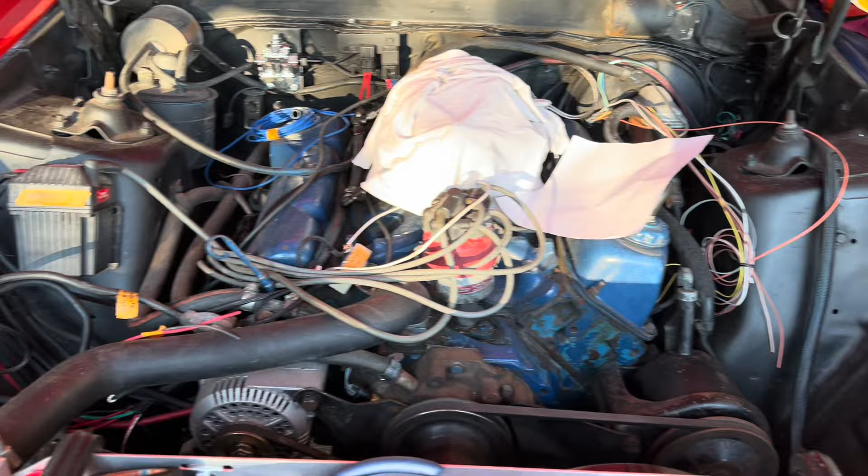It's been a while since I've worked on it, probably a couple months, maybe a little less or more. The issue I was having was this part that finally came in, took that long. It's from Tanks, the kit for the fuel pump to go inside my tank.

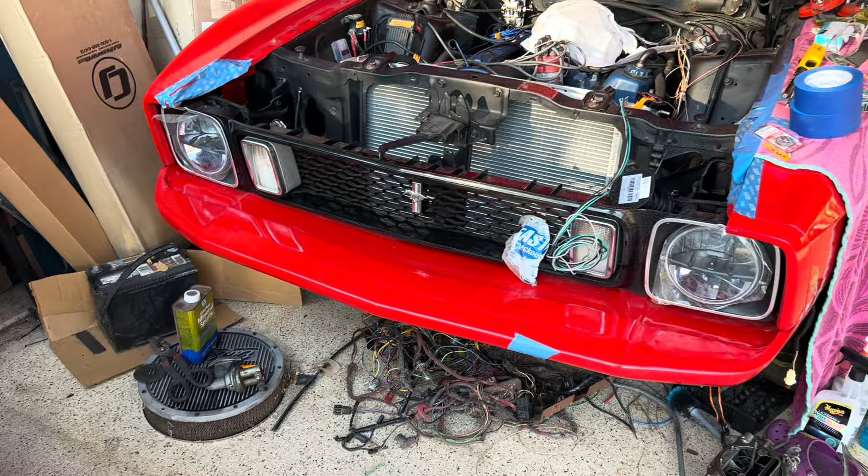That way I don't have any issues with it down the line. Looks like it's opened already, I did not do that. Hopefully I have everything I need. I'm gonna go ahead and take the tank out, see how everything fits before I actually start cutting into the tank and mounting it.

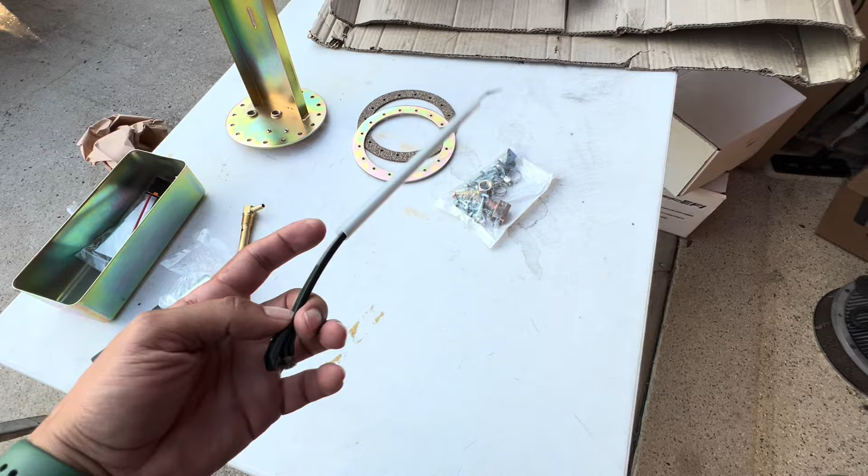Okay, here's what the kit comes with. I got the little tray, I believe this mounts to that somehow. Got a gasket, and I think this goes in the top of the tank. The hardware, that's trash. A few zip ties and a straw in case I need a drink... actually I think that ties into this somehow. And this is something for safety, I think it's like a rollover type gas shut off or something like that. I don't remember the exact name for it.

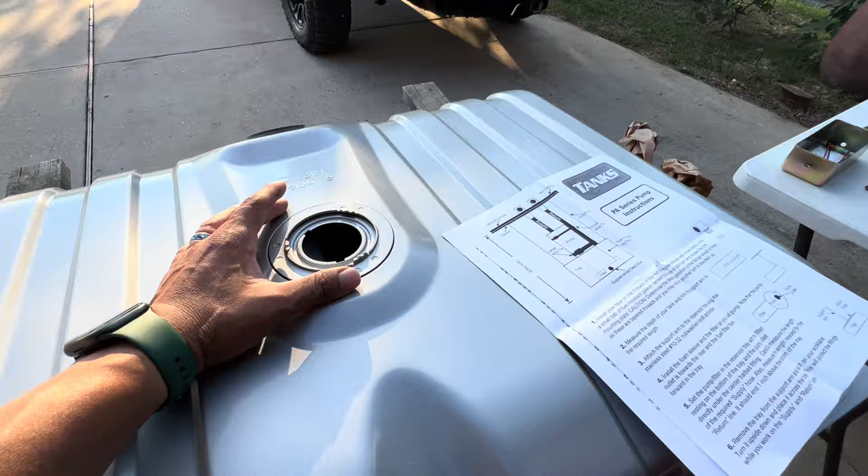So I did have a plan on how I was going to do this, and I don't remember exactly how I was going to get it done. There's a guy on YouTube who's done it before, so I'm going to look at my notes and maybe that video one more time before I start cutting. But I believe he put it on here, marked it with the Sharpie, because it's a flat surface. I think that's where it was. I don't remember. Then he installed the rest of the hardware to go with it.

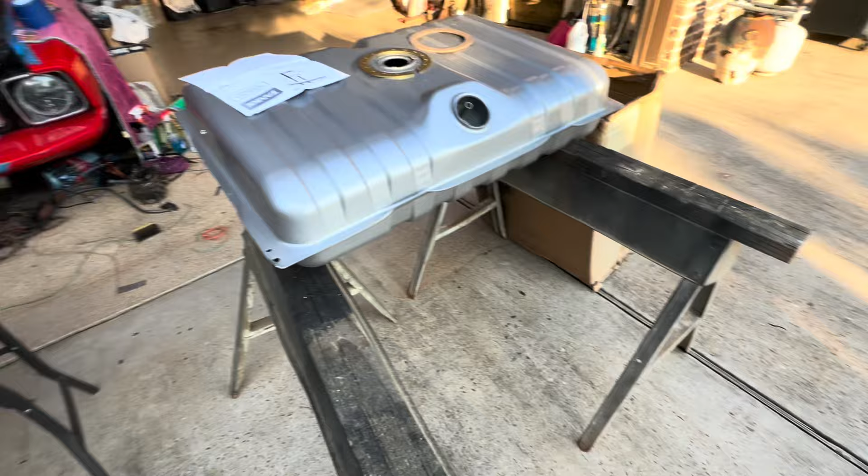So we're gonna look through my notes and figure out the best spot to put it so I can get that mounted. I do believe he cut this section a little bit to make it fit, I think it's too long for this tank. Let's go ahead and figure this out and go from there.

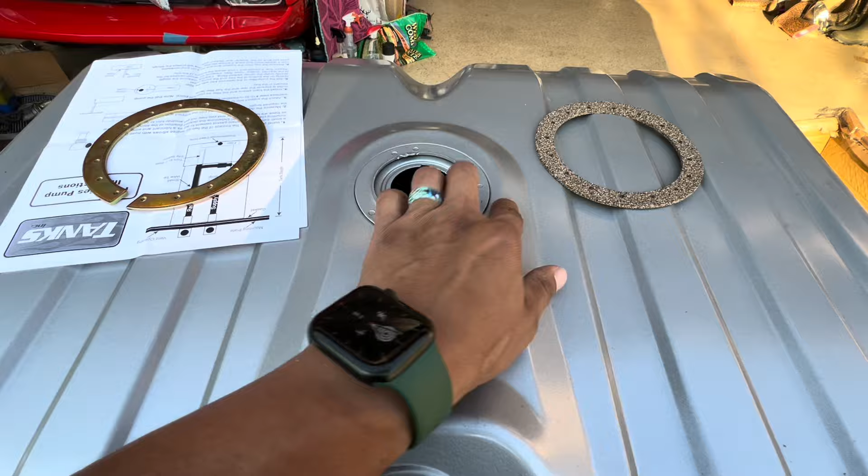If it does go here, I see there's a little gap here and over here, so it's not going to be a complete flat surface. I don't know if the original tank is quite like this, I still have it so I'll probably take a look and see. Worst case, I may have to dolly the surrounding area to make this flat.

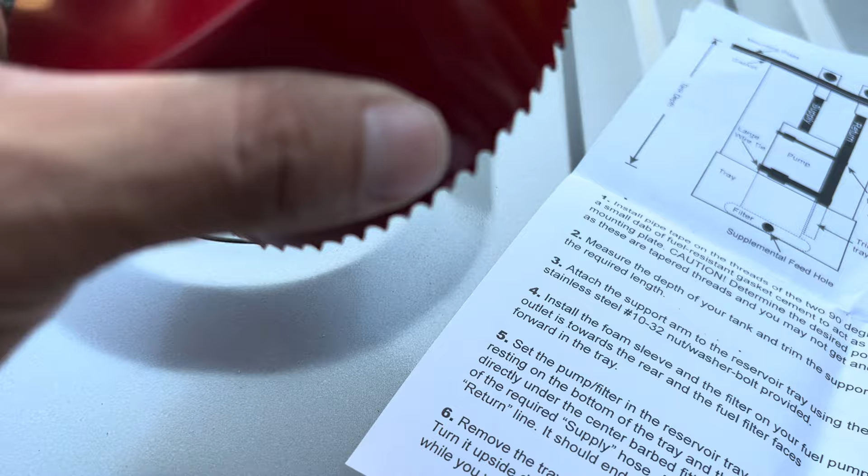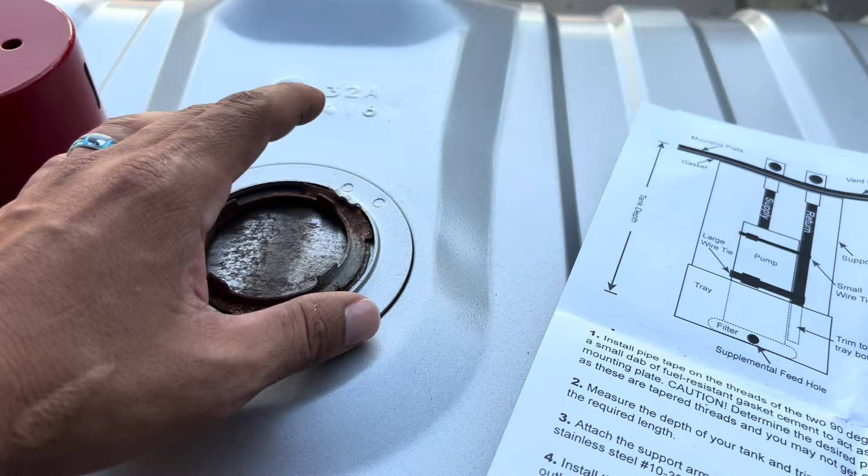I have this piece of metal, which the guy on YouTube used as well, and he drilled a hole in the center so I can have a little pilot hole to drill exactly in the middle. He used a 4-inch hole saw, and this is what that is as well. It's 4 inches, but his goes out to the end, so mine doesn't quite do it. I'm still gonna go ahead and drill the hole, and if it's still not big enough for that thing to slide in, I'll just gently make it bigger until it fits.

So I need to find the center of this so I can drill into it, and once I drill into it, I'll be able to mock this up to get that installed. This piece here goes on the inside of the tank, so if you look closely you can see the threads for the hardware to go through. I'll mess with that a little later. This is not as easy as you'd think, it's not terribly hard, just time consuming.

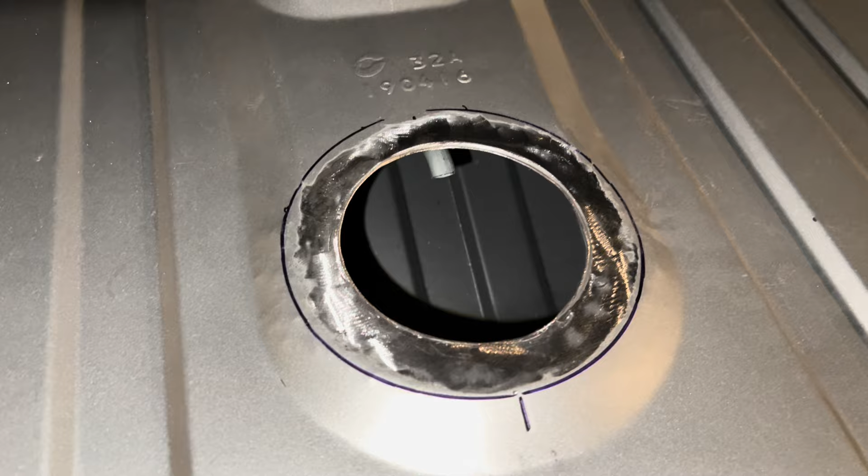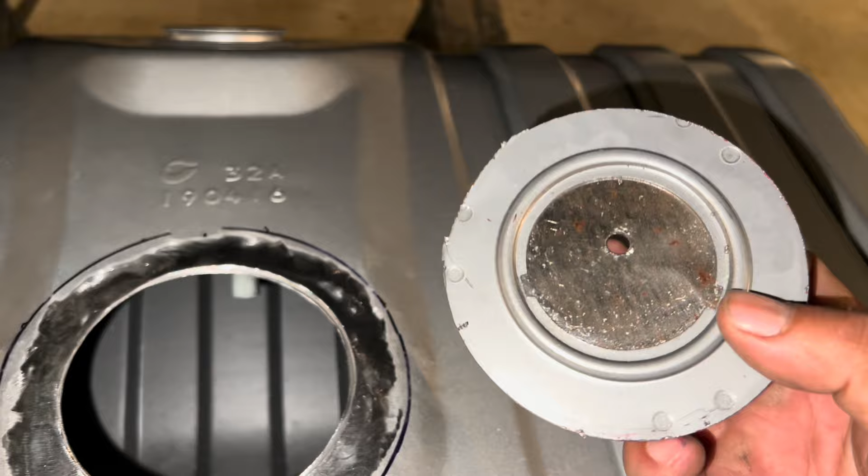So I went ahead and drilled a hole. Like the guy in the video, I put a little piece of metal, drilled a hole in the middle. It does slide some, so the problem I'm having is whenever you get close to drilling through, first you have this little cap, then the sheet metal in the tank, so it gets stuck on this, and finally you get it out and it starts to get stuck on the actual tank. But I got it out, sanded the area to make it sharp, then hammered and dollied the sides because it came through on both sides, so I had to raise this whole section up some to make this bracket fit.

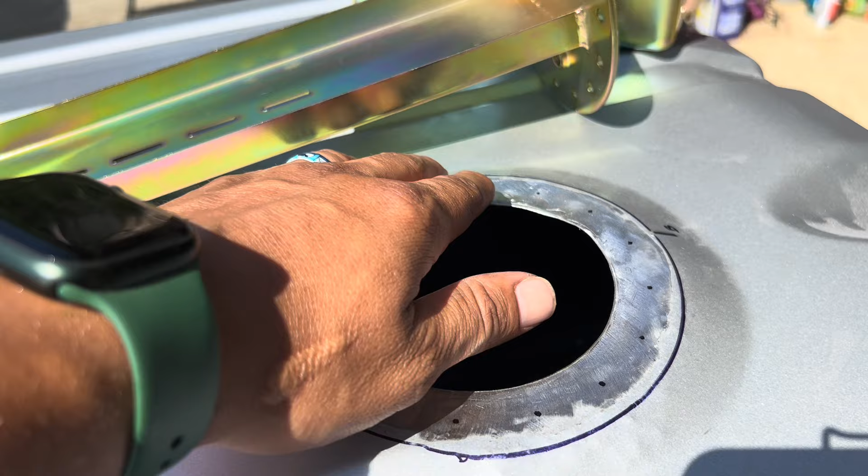It's still not perfect, as you can see, but whenever I install it from underneath and put the screws in, that's gonna bring it up and create a seal. Alright, so I got everything as close to flat as possible. Got the holes kind of marked, and now I have to drill some holes with the 3/16 bit. Let's go ahead and do that and see if it fits.

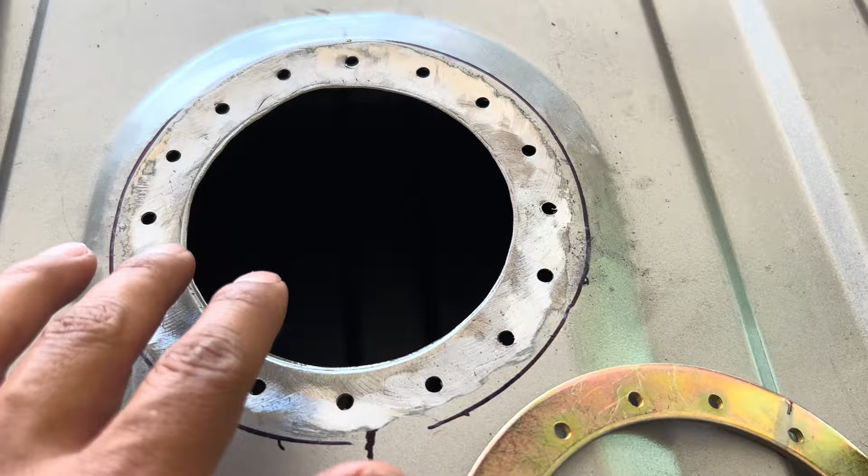All right, so I got all the shavings cleaned up, smooth again. And now, per the instructions, I have to get this inside and weld it.

You don't have to weld it, but I'm gonna go ahead and do that so I don't have to mess with it. So if you're wondering why it has this opening here, that's to slide...

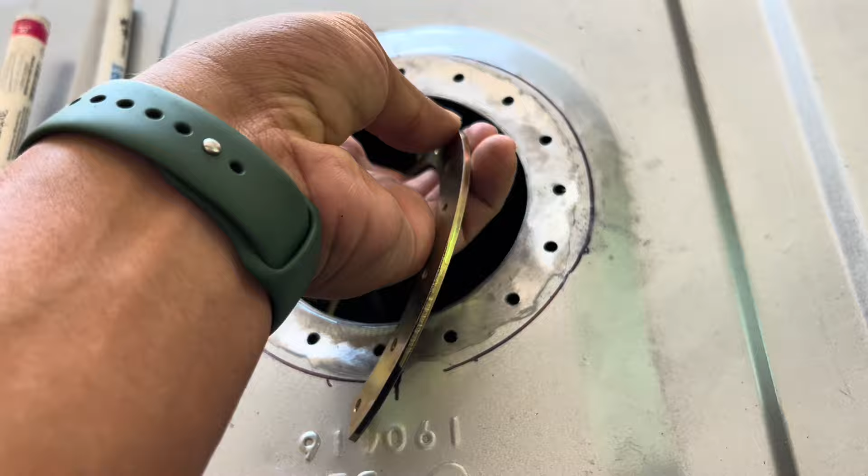kind of like a horseshoe, this bracket in, and then line it up to the holes and then install it. So per the instructions, I'm gonna put about 4 or 5 screws that came with it.

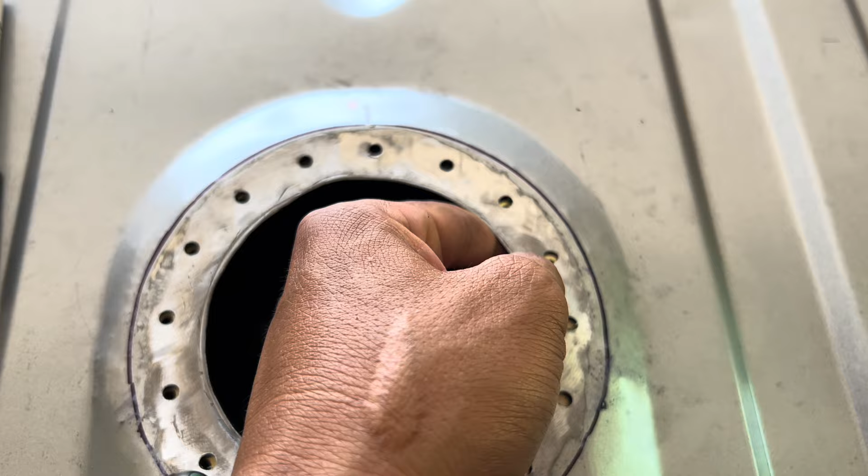Make sure you take the O-rings out so you don't burn the O-rings out when you're welding it. So once I line it up, I'm gonna tighten it up and then tack weld it.

Okay, got all the screws in, and the instructions say to put like 4 or 5 of them, but I wanted to get all of them in because if you have a problem, it's easier to fix it now than when you weld it. So I went ahead and put it on, and sure enough, I did find a problem.

One of the holes wasn't quite lined up. It was a very, very small amount that it needed to be made a little bit bigger to fit the screw through there. So I took it out and grinded it a little bit, and everything works fine now. It did straighten up just a little bit more.

So if you look inside, it's a nice flush finish all the way around. So obviously I'm just gonna start in one section, put another one across where I put the last tack, and then do like a crisscross pattern so it doesn't warp or anything.

So I'm gonna go ahead and get the welder out and start getting this done, and there'll be one less thing that I have to do.

And then next I'll go ahead and measure the depth so I can cut the right height so it sits in there properly. When you put the pump in, the instructions have you put it down here, and it wants the strap to be in the middle of the fuel pump.

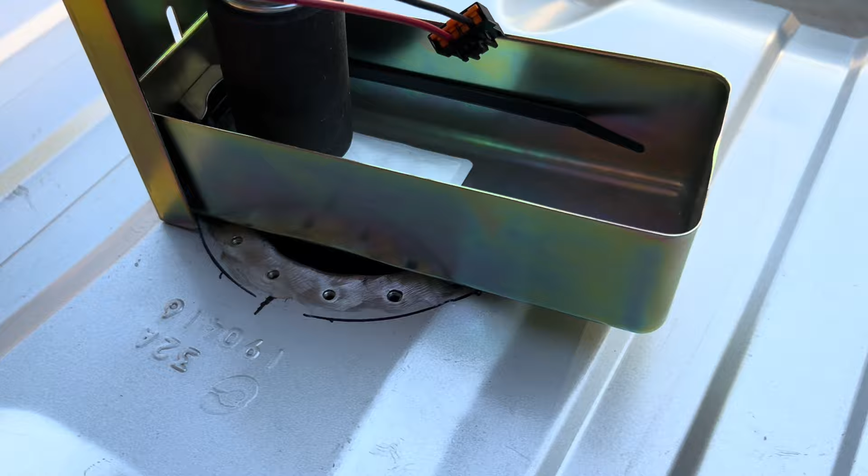Well, since you cut it, every tank will be a little bit different, but if you're using it for a Mustang 71 to 73, you're gonna come across the same issue that I have. It's gonna run across the bottom here instead of halfway. And he said it's okay, it's not that big of a deal.

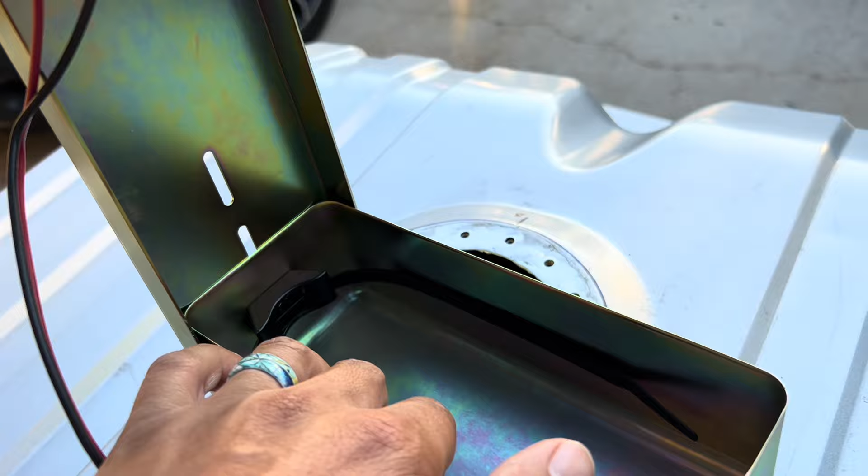The other thing that the instructions are not really specific about is this little clip here, or holder for the strap or the zip tie. It does come with a stainless steel nut and bolt that kind of goes through it.

Otherwise, it'll stick out a little bit too much and hit the fuel pump. I did the bolt in here and then the nut out here to make it a little bit easier. But you can do it however you want.

So it doesn't really give you a specific location for it. I was thinking at first it was gonna come up here, but it actually goes through the hole that's in the tray. You have a hole that's about right here on that side, and that's where it goes through.

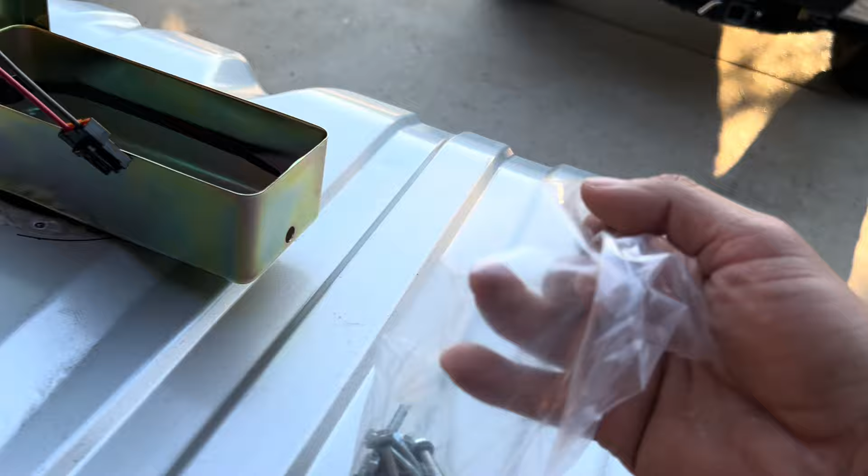And then you have a bunch of different size screws. They're not all quite the same. Not sure why. I know this big one here, there's a really long one.

That's in case you don't tack weld the ring inside, to kind of help you fish the gasket through and all that stuff. Some are a little bit smaller than the others, but what I think I'm gonna do is stagger them, put a small, big, small, big, that way they're not all on one side with all the big ones on the other side.

So now I'm just gonna kind of tighten everything up. I'm gonna go ahead and put the pump in and measure it. I wanted to get this location done so I can put Teflon on these and set it down to the location I want.

Once I do that, then I'll go ahead and put the pump in, measure it, cut the hose to length, clamp it down, and then I'm gonna clean the gas tanks.

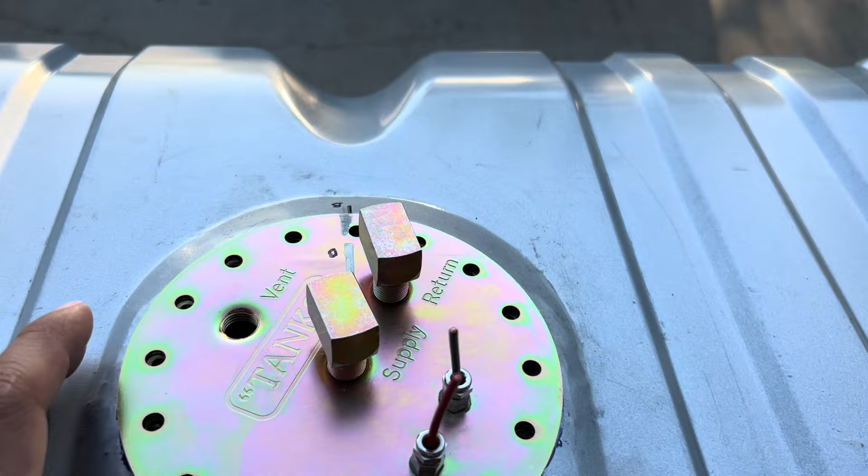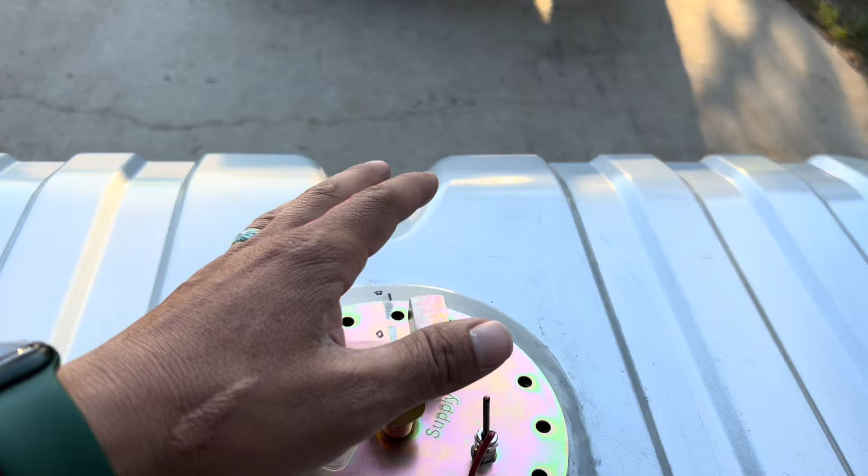Trying to test fit everything and see exactly how everything is going to fit. Got these fittings here. There's a brace here that goes back here, that the straps that hold the tank, it's like right here. So I think if I run it straight, it'll be good. I may tilt them just a tad like that, so the hoses don't get too kinked.

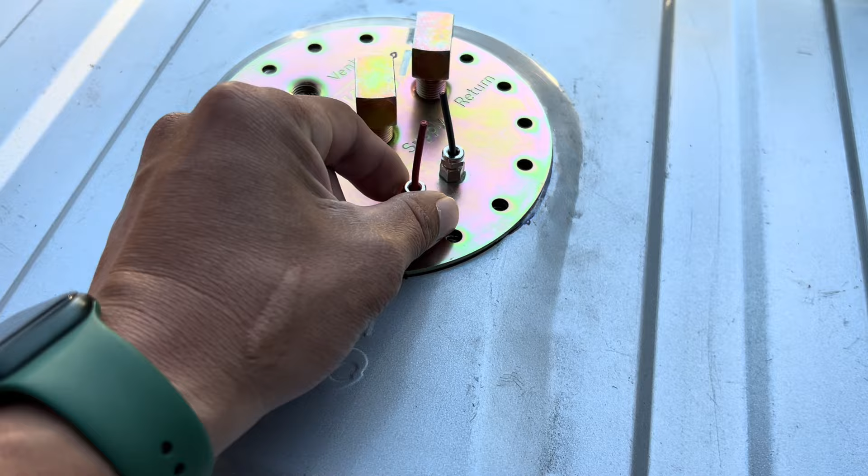Gonna mess around with it for a little bit and figure out exactly how it's gonna go. Now these wires here, if you look at the videos on YouTube, these fittings are a little bit different from those. The ones online don't show it quite like this, so I called them up to verify, and these are a little bit better fit, I think. If you look inside here, you have a rubber washer and a metal washer, and when you tighten it up, it squeezes it and it does not leak, is what he told me. So if you have to tighten it down, just make sure you don't miss the bottom part, because otherwise you'll have leaks. But once you tighten it up, it squeezes that rubber seal and keeps it from moving back and forth.

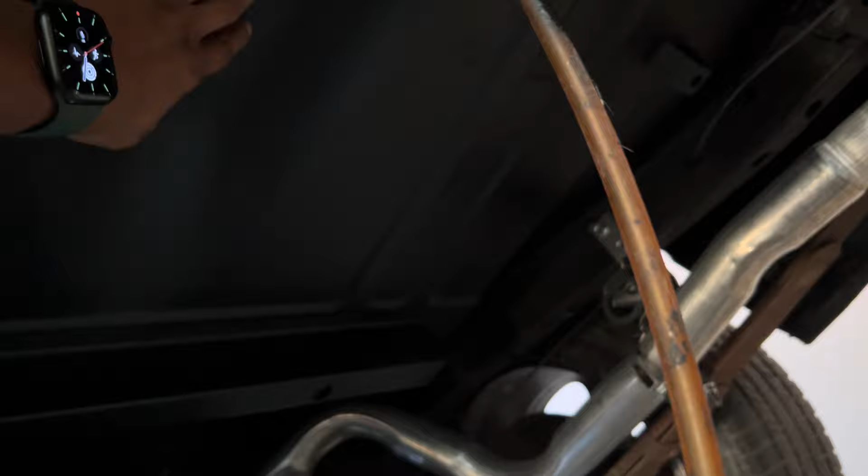Okay, so trying to figure out the best location for these fittings here. You look at this indentation in the trunk, that's where this section sits. So originally I was going to have both of these facing forward towards the front of the car, but the problem is they'll be too close together, and the fittings I get for this, I don't want them to interfere. If they're like this, there's very little space to tighten up the fitting that goes in here. So I'm thinking about having one face forward, which will be the return, and the supply line, this one right here, face towards the driver's side of the car, because this is the feed from the car. I just have this temporarily, but the feed comes from this side anyway, so I think that's gonna work for me.

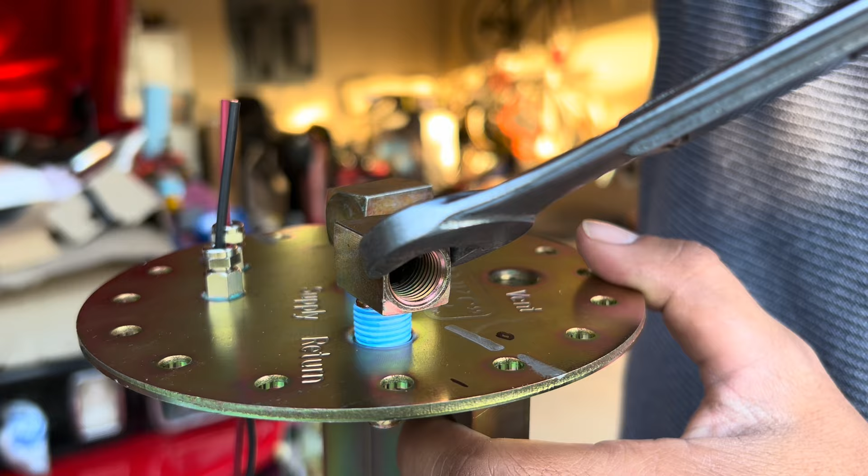Now I'm gonna go ahead and fit the pump in there, so I can measure the tubing so I can cut it to length.

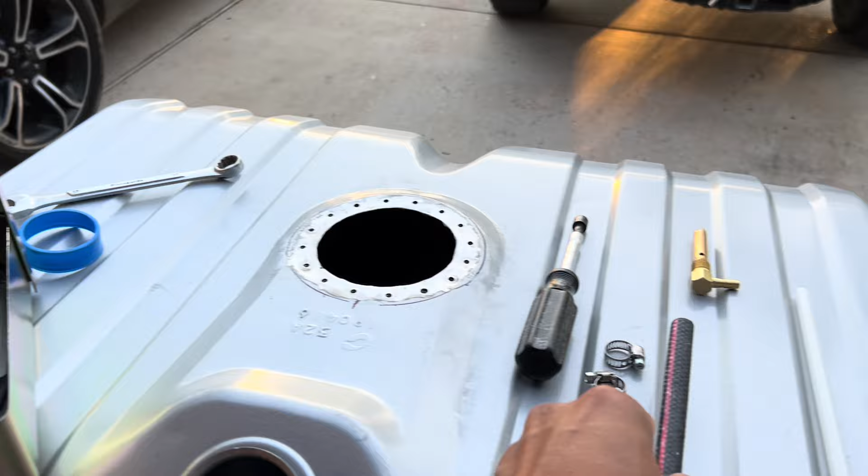Okay, next step is to cut these to size. The black one is the supply line to the fuel pump, the straw is the return line, and make sure per the instructions to cut it about an inch short to make sure everything works right. So I'm gonna go ahead and cut those, install those, and zip tie it together, and then I'll be good to move on to installing the gasket after I clean the gas tank.

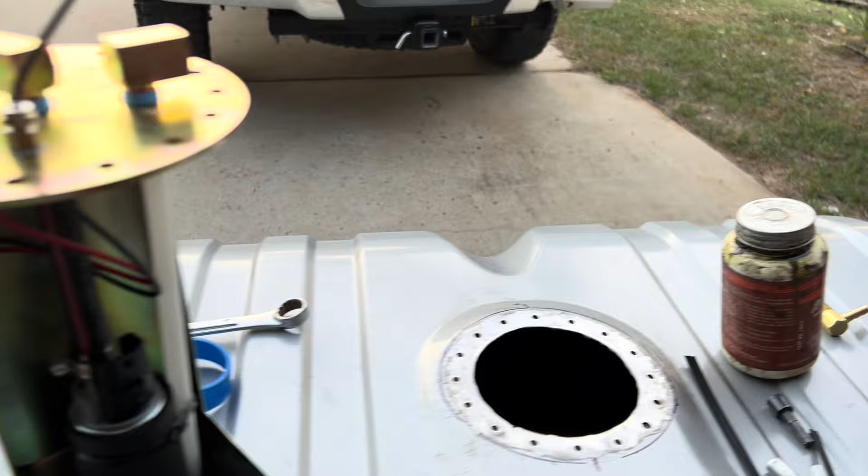All finished up. Everything zip tied, bottom, top's tightened. All I need to do is just put the fitting right there, and then that'll be it for this. Make sure you put some dielectric grease on the end of the connection. And then these here, they're still loose. I'm gonna wait because I don't know how long, or if I'm gonna have to shorten them up once I get it in the tank. So that's not that big of a deal, but for now we're gonna call this part done.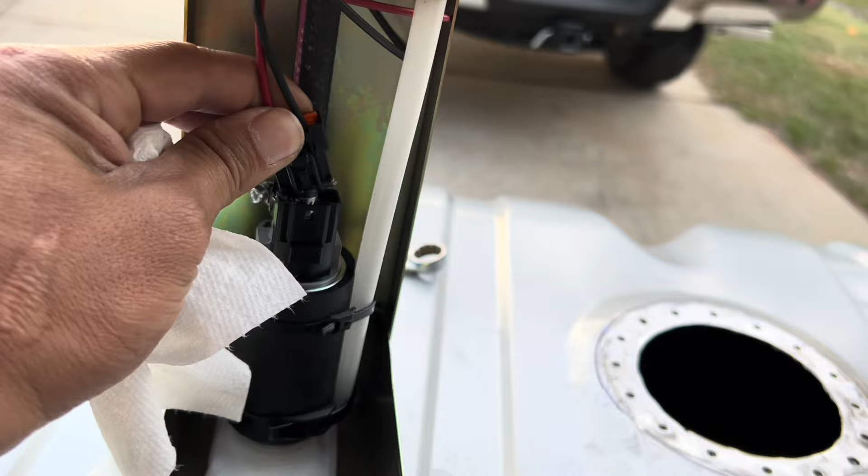So now that I have everything cleaned inside, what I'm gonna do is go ahead and put some of this sealer before I put the gasket. Some people say to just put it on the bottom, so I'm gonna go ahead and do it at the bottom and the top just to be safe. And then I'll go ahead and put the pump in, didn't screw it in. So I'll go ahead and get ready to put some of this primer in.

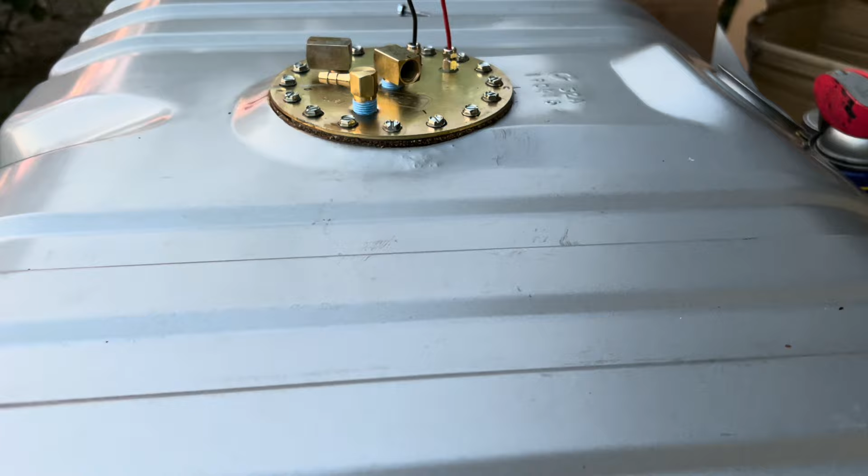Seems like everything is sealing up just fine. Glad I put the sealant on both sides of the gasket. So we'll see if I have any leaks whenever I put some gas in it. Hopefully not, because I don't want to take this whole thing back down. But for now, we're gonna call this done. I need to get some fittings for here so I can run the fuel lines. I'll probably get some tomorrow or so, but for now I'm gonna call this done.

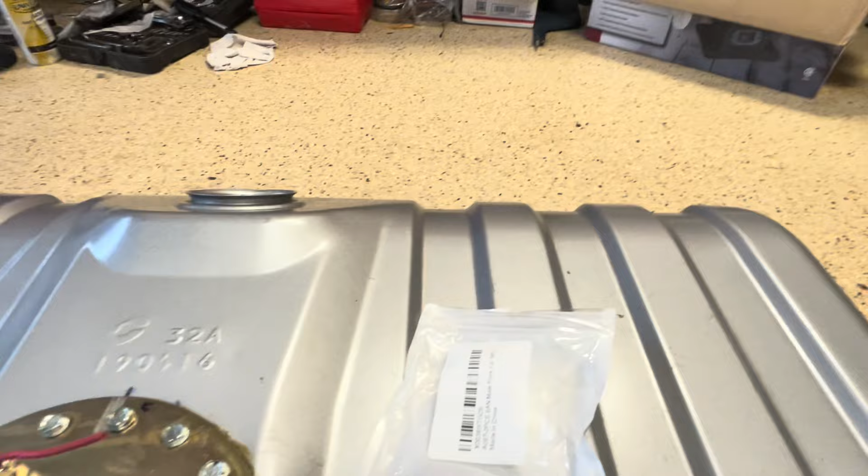Got my fittings in today, got 2 of them. Chinese ones, but as long as they work, I don't really care where they come from. It even came with some of this Teflon tape. It looks really cheap, so I'm not really gonna use it. I got this blue monster tape that I've used before, and I think it works really good. Never had any problems with it.

Figure out the routing of the pipes, or the hose, I should say. So let's figure that out and then put this bad boy in.

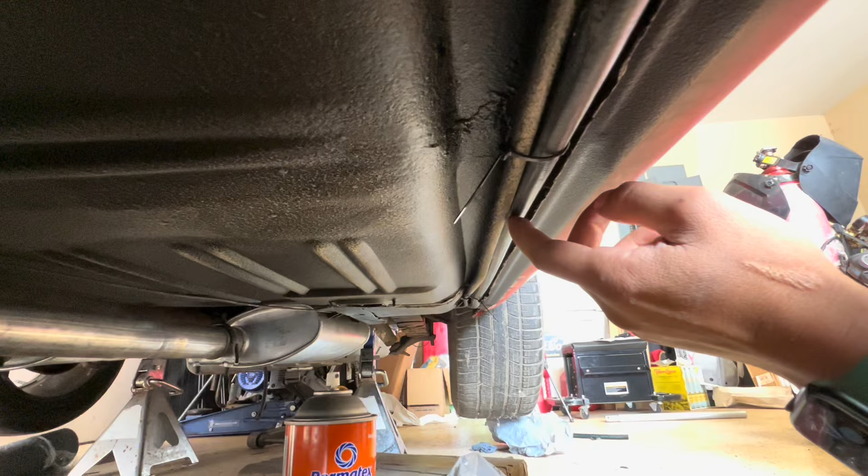Okay, so I temporarily have the return line installed. I just wanted to mock it up to see how much hose I was going to need. I don't know how good this line here is. I've never really had any problems with it, like clogging up the carburetor or anything, so I'm thinking about maybe replacing it with a new one. I have to maybe call Holley and see if I can use this old line and just put the pressured hose at the ends for the fuel pump and in the front.

So anyway, I have it ran here. Don't know how I'm going to tie it down yet. I have these zip ties just for now. So I have it going all along here, bending the corner there, and then bending the corner again over here. And then it goes up and over, and I'll show you what that looks like.

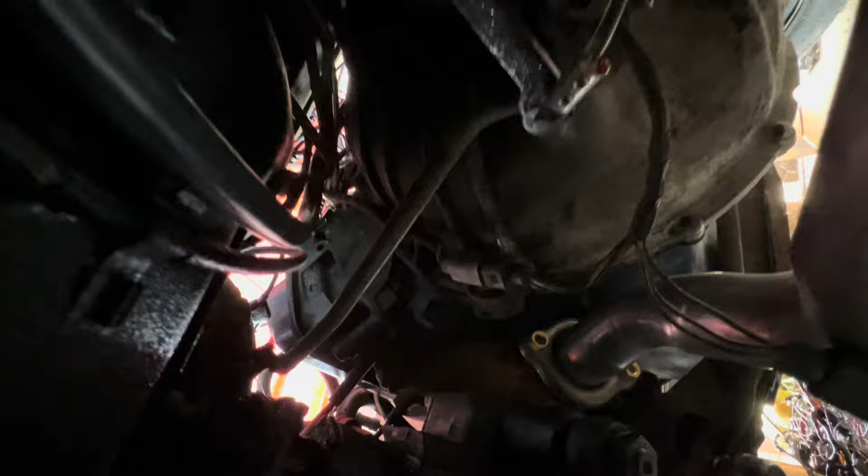And here's the front of the car. So the instructions have the return line coming down from the bottom here, so it's going to connect right there. It's perfect. And this is all that I have left, I would say probably about 4 feet left.

It's definitely not enough to run another line. I have to look at the instructions. I'm assuming, since they only send this much, it's just for the return line, not the supply line. So I'm going to mess with that here in a little bit, do some research and see how I'm going to do that, because I still need to run the other lines.

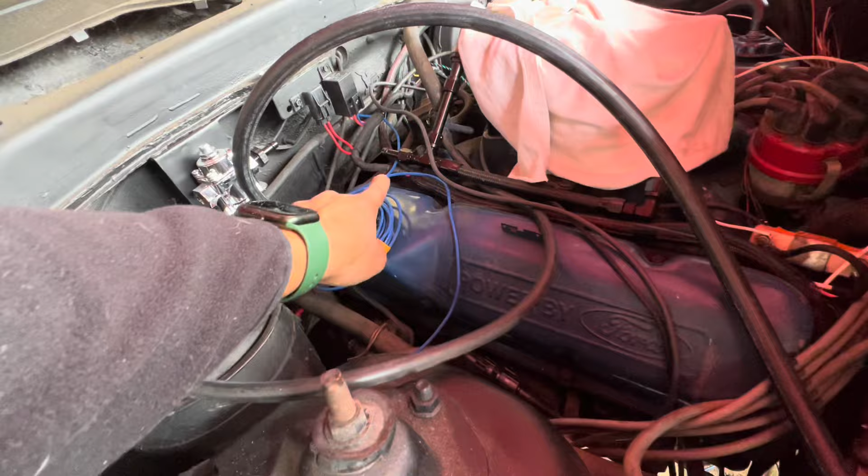This here, which I have enough of, just goes from here to that end. It has to be a nice smooth turn. And then I believe the supply line comes in here, this end. So I'll double check it before I install it. So this is the return, the supply, and then it comes out here and it goes into the throttle body, and I believe that's it. So I think I have this figured out.

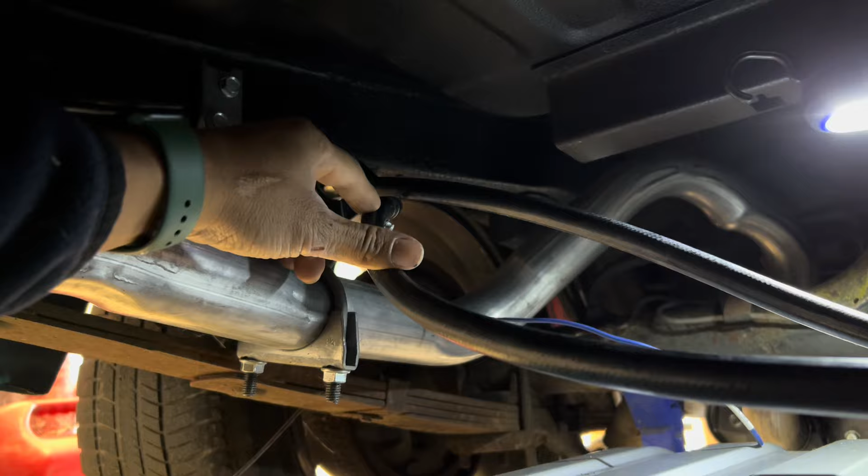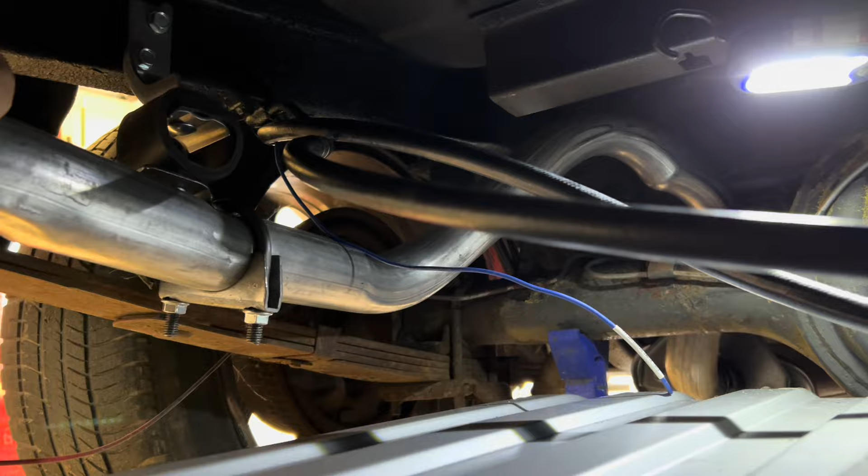The manual does give you an option to use the original fuel line, which is this one right here, this bottom one. So what I'm going to do, because I did look up some information about it, and some people have used it before, and some say not to, because the fuel pump creates more pressure than a stock mechanical fuel pump. So what I did is I'm going to use it, see how it goes, but I'm going to use it for the return line, which is what this is.

I had to reroute the top section here, have it going back now since I'm using the original. That way it's not too kinked. I don't want to disrupt any flow coming into the gas tank. And then the solid rubber hose, I have it going to my supply line, which is this one here.

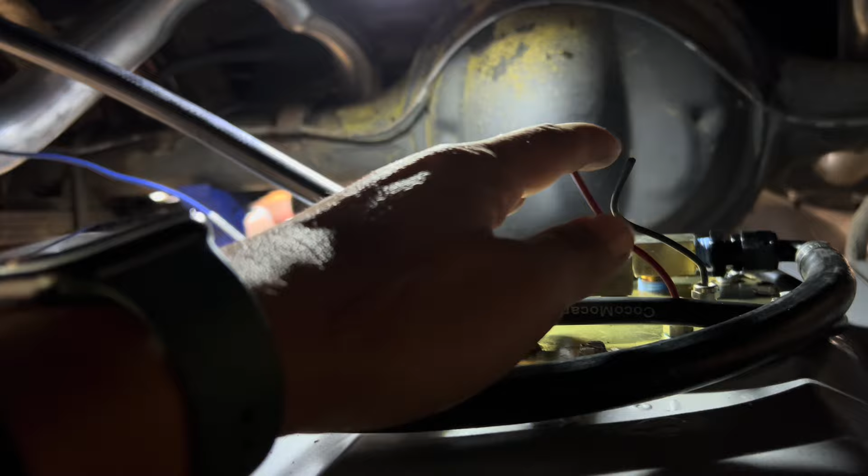So all I have to do now is just wire the positive and negative. Here's the positive wire here, it comes with the Holley Sniper EFI. It's not quite long enough, so I'm going to have to add a little bit to it because of the way I chose to run it, which is pretty much along the frame rail with the stock and the other hose for the fuel. That way I don't have wires going everywhere.

And then what I plan to do is just run the ground wire maybe up here somewhere. Not quite sure yet. I even thought about putting it here with the exhaust bolts, but that may not be a good idea, so I'm still playing around with the spot or location for it.

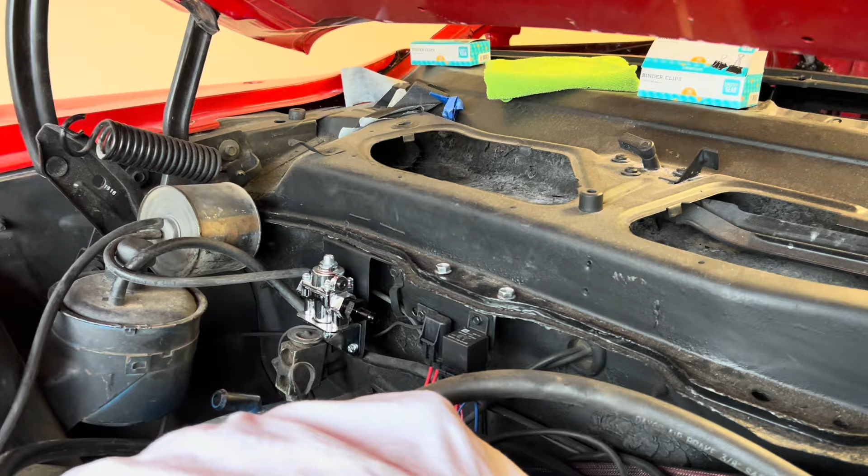So the dilemma that I have now is the placement for the fuel filter. I need to find a location for that, and I don't quite have long enough hose. So this is all the hose that I have left, and it's going to go on the other side, left side. I'll have to look at the manual, but either way, I'll have it going or routed the correct way. But I don't have enough hose.

This is the stock hose. It came from down there to here, so I'm not going to use this anymore. I'm going to use that, and I want to run that to that, but I don't quite have a long enough hose for that. I'm still playing around with the routing of the hose down here.

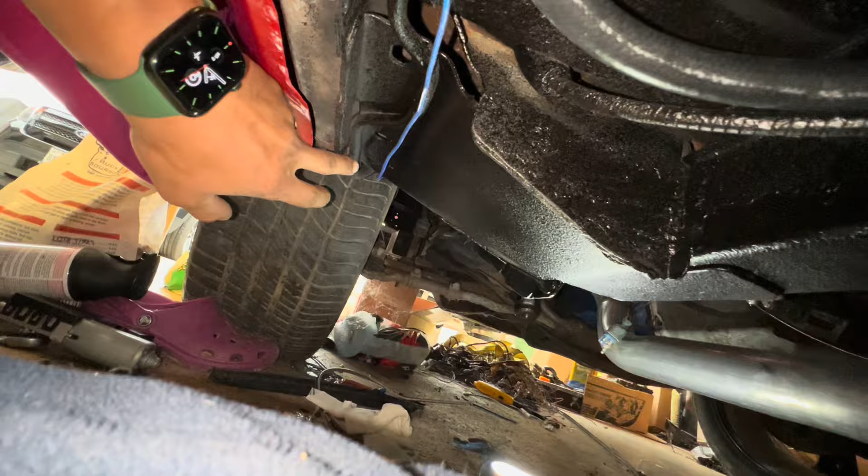Here's a close-up of what I'm talking about. The original fuel line goes to the front. I turned it here and there to get it to the front of the car. So if I get rid of that, I'll be able to have enough hose to finish my project.

The problem is that once it comes to the front here, I don't want to drill through the firewall or anything to get the fuel line. The one with the blue tape that you see here goes inside and supplies fuel. So I'm not quite sure what I'm gonna do yet, but this is the way I have it going here.

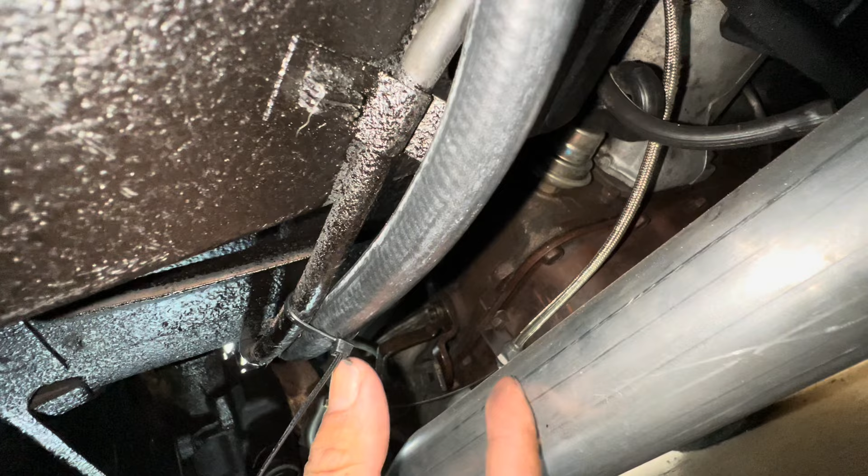It's about 4 to 5 inches away from the exhaust. I could put a heat shield or something here to protect it, which I'll probably end up doing, but I really don't want to. I just don't know how to make it go where I want without drilling any holes. So we'll see how that works out.

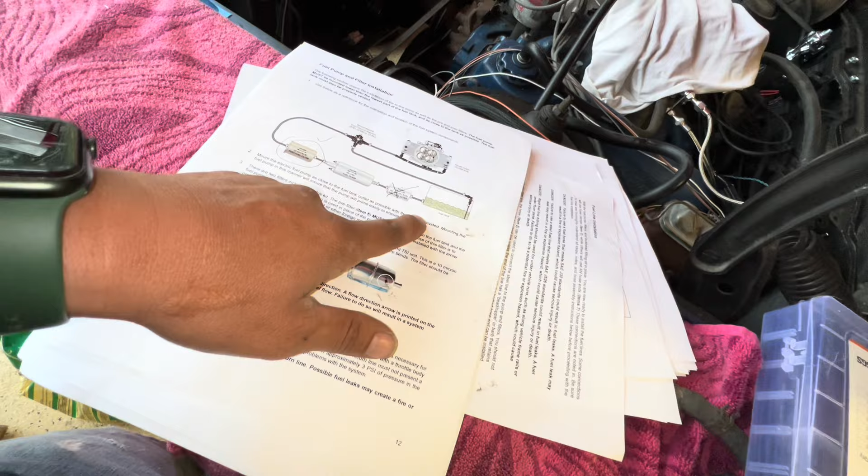For now, I need to find the fuel filter location. Here's a diagram. That's the only fuel filter I'm going to use. I don't have to use this anymore since I have that fuel pump inside the tank. This is just to protect it from dust or particles in the tank before it hits the fuel pump. The fuel pump in the tank now has a little sock in it to protect it from any trash that may be in there.

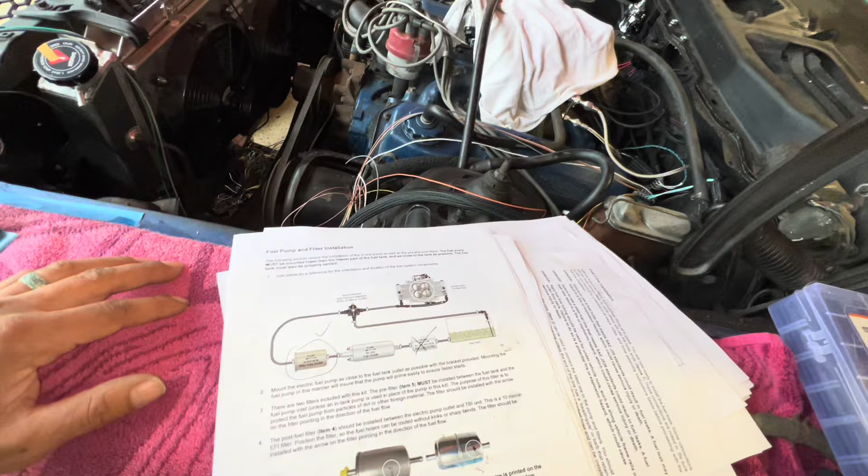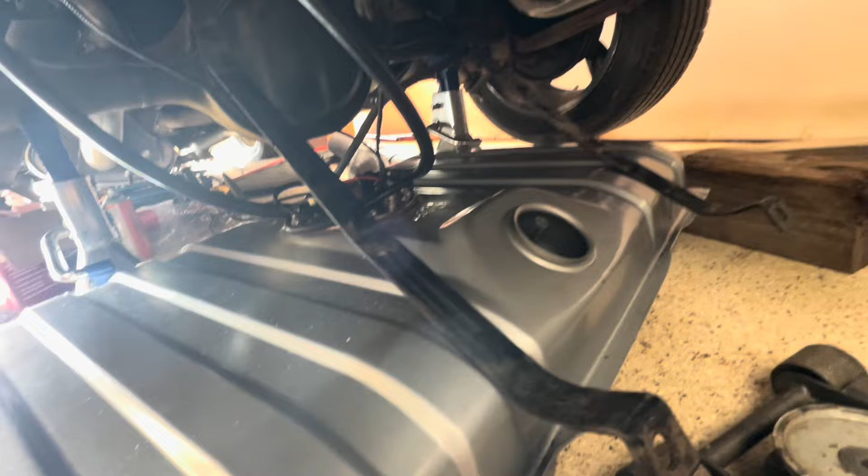So let's see if I can figure out the rest so I can finish the fuel system on this car. Okay, I got the tank all prepped up for the installation. I got the little brackets here, and I got the wires done—the one wire that comes from the kit, and one to the ground. Decided to put it up there, hopefully that works out. Got everything shrink wrapped, zip tied, tightened. So all I have to do now is press it up there and tighten it up, and this section will be done.

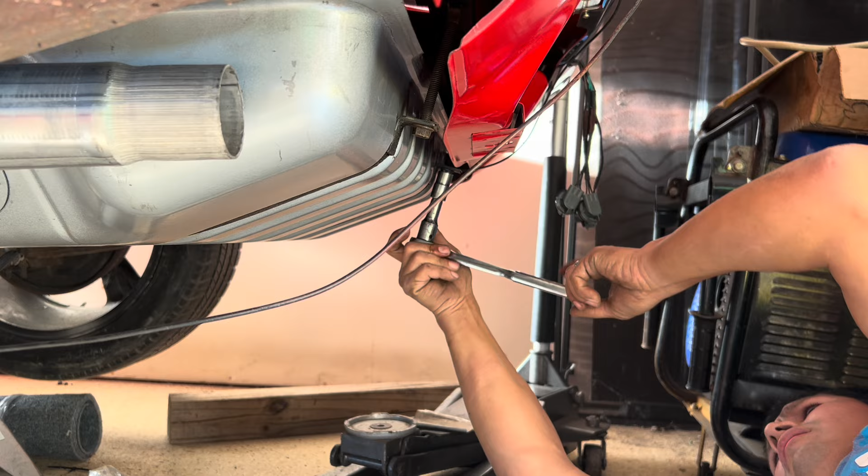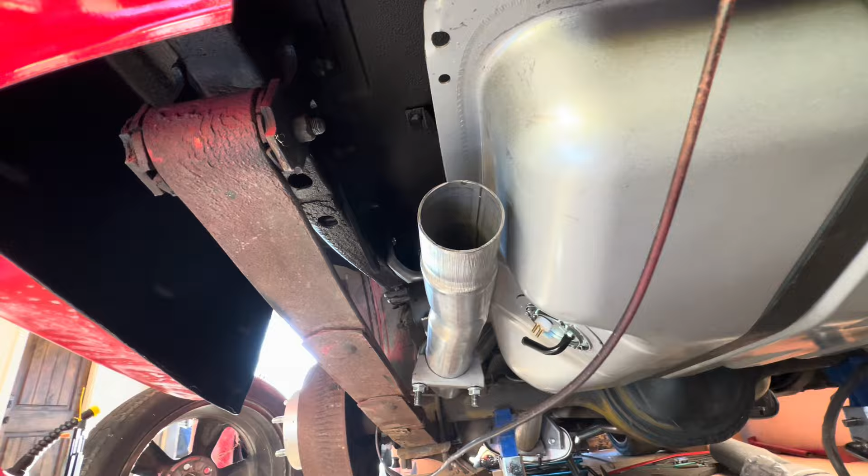We got the gas tank installed. Everything has enough clearance. Checked the hoses, moved them around. It's good to go. All I have to do is connect the gaskets and stuff from the inside of the trunk, and I should be good.

One thing I did forget to mention is with this here, if you're gonna do the fuel injection pump inside the tank, you don't need this. So I went ahead and welded it shut, and then painted it to keep it from rusting, because when I welded it, I took some of the finish off. So I painted it just to keep it from rusting and stuff. So that's good to go.

I need to connect the fuel gauge, I believe it goes there, and run it to the front of the cluster so I can get a reading on the gas. But everything else turned out pretty good.

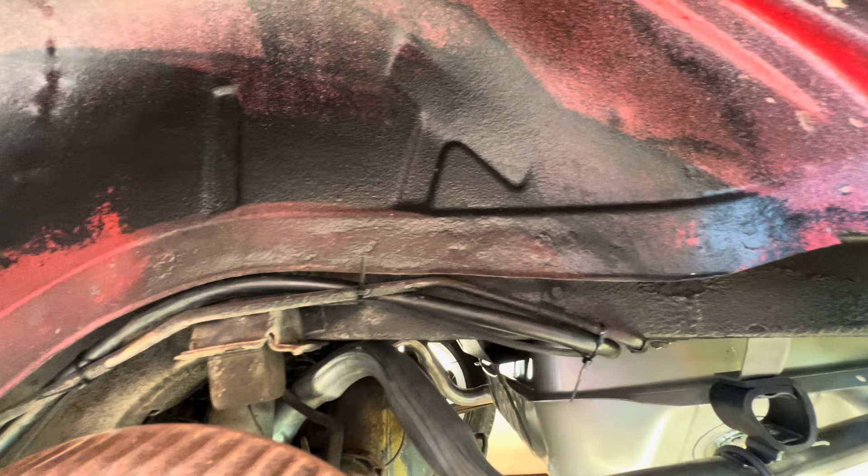Really happy. So these zip ties were temporarily put on there just to run the hose and see which direction I wanted to go with it. Now that I know it's gonna go there, I got some better stuff to put on there, make it look a little bit nicer. I'll probably still leave some of the zip ties on there.

Here's some of those clamps I was referring to. They're stainless steel with a rubber coating on the inside to help with friction on the cables or any hoses you may have. I think this will look nicer than having the zip ties. I may leave some in tight sections where I can't get these on, but for the most part I want to use these.

And I got these stainless steel bolts from the local hardware store as well. I got the smallest ones I could find, so it doesn't look too ugly when you tighten them up. So I'm gonna run through the whole fuel line, get those installed, tuck them in. I'm sure you could probably drill some of these into the frame, but I don't want to do that, so I'll leave it just like that. Maybe tuck in the screws a little bit more, but just to give you an idea of what I'm getting ready to do.

Tank installed, and I need to put on the gaskets and rubber fittings that go on this, which I've had for a while. I have this here, this one here, and the big one that goes right over that there. And of course, I have the pipe.

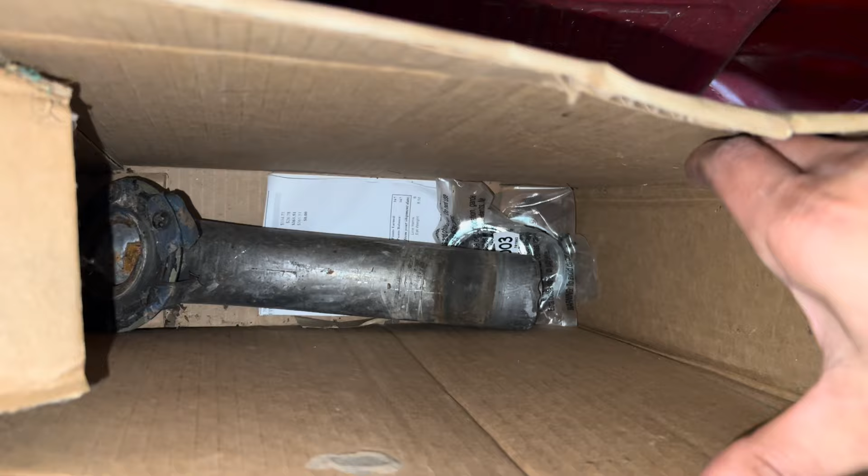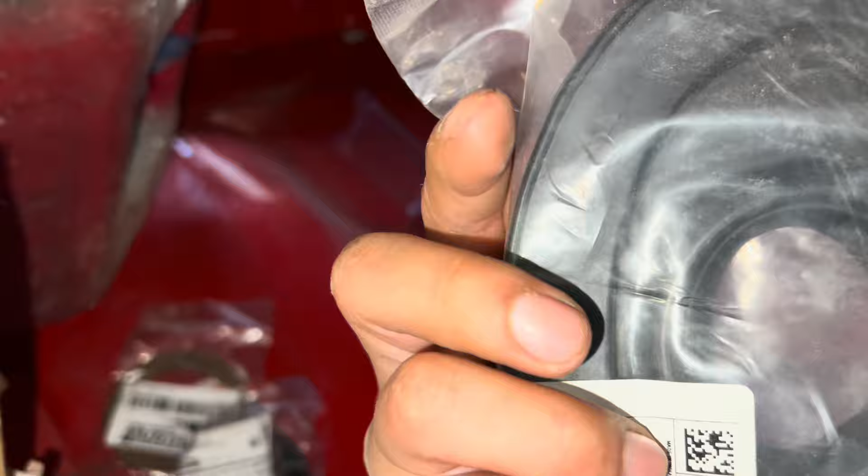Need to figure out if this gets any type of gasket on there. I don't have one, so I'm assuming it doesn't, but go ahead and open these up so I can put these on. This here, I'm guessing, goes on the top here. I think I have everything hooked up for the fuel injection, so I need to cycle through it a few times.

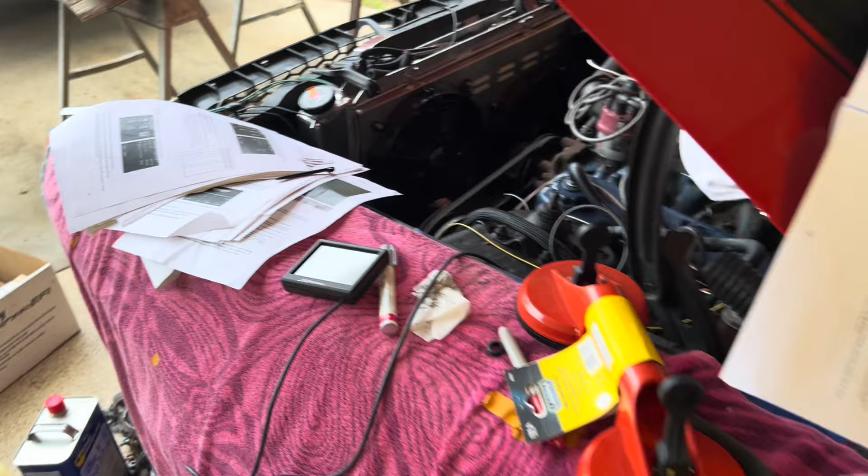I have my computer plugged in. I don't have it run inside yet because I'm not sure where it's gonna go. I still have a little bit of stuff that I need to do inside to get that put on, but I can easily check it from here, make sure there's no leaks or anything. All right, let's go ahead and put these on.

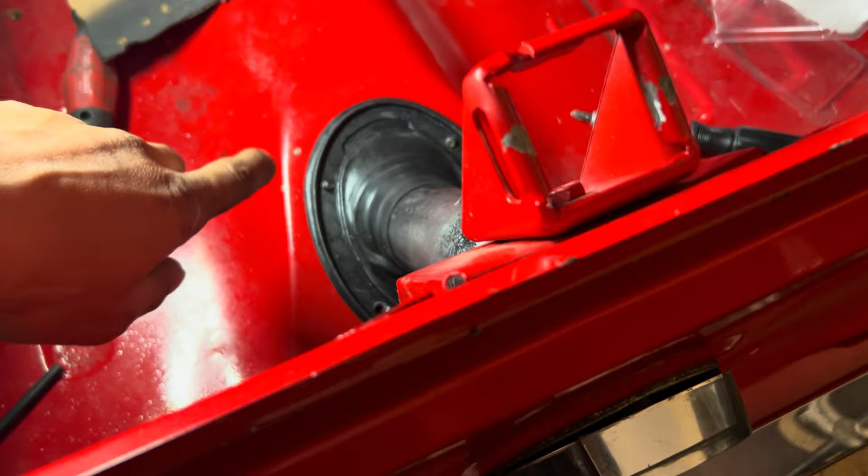Done putting on the gaskets. There is no gasket or seal that goes between this and the floor of the trunk, so I went ahead and just put it on like that. I can't find my... it seems like you always lose something, so I have one missing screw that I have to look for. I did have all four because I painted them to get some of that rust off.

All I have to do now, since I do have gas in there, is just cycle the pump through a few cycles, maybe 3 or 4, like the instructions say, to prime the lines. They also say to clean the return line. I don't have really anything in there because I hadn't been using it before, and the lines are clean, they're brand new, the one that came with the kit. So I don't think there's any trash, I'm gonna go ahead and risk it.

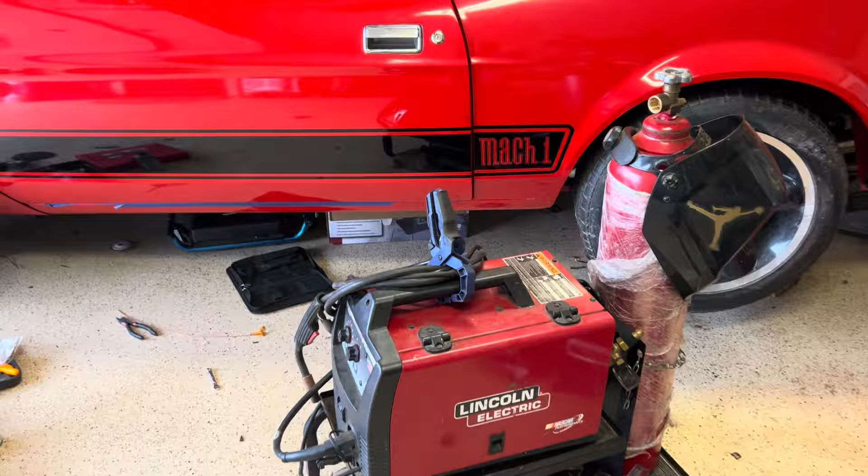I do have a filter, so worst case I'll just replace the filter. Yeah, let's go ahead and cycle it and see if we can crank this bad boy up.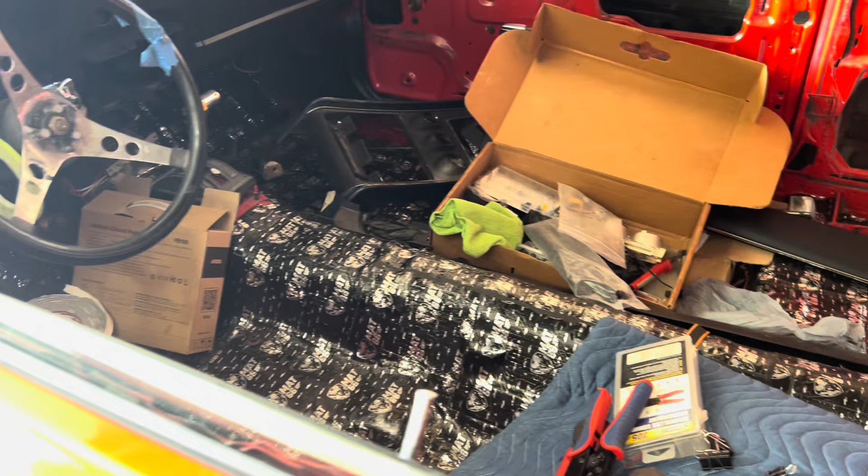Now that I know that the car runs, I can move on to something else, which I'm happy it ran. It's about time, seems like it took me forever to get that stuff done.

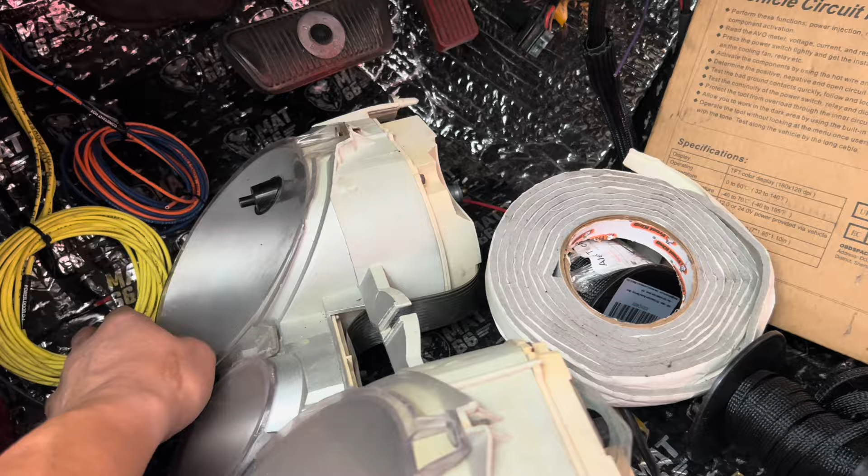So I need to clean some of the stuff up inside. I have too many loose ends. I have some of the wiring that I still need to figure out, or just kind of hide and tuck in, like the ones there that I'm gonna leave in case I ever have to do something else. I'll leave this for the doors and automatic windows. These were just constant hots for any accessories you want to run.

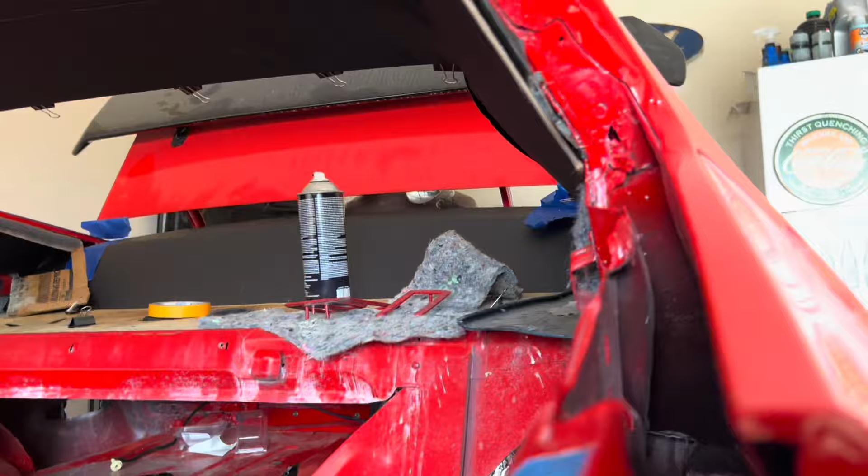I got the headliner in. I am missing some of the trim pieces. These are metal here, and the one in the front, the A-pillar moldings, I do not have for there. I do have these, one of them is broken. I think this one's broken, the other one's not, so I can probably reuse it.

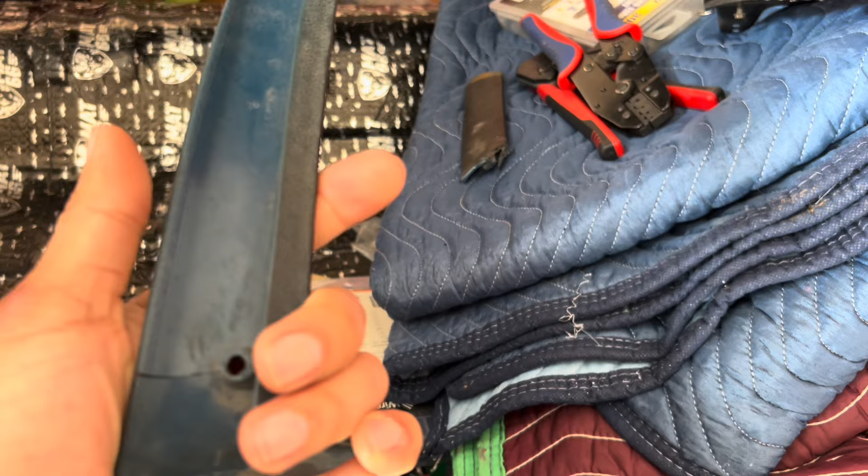What I'm thinking about doing is, I've been doing some research on fiberglass. See, there's the one that goes there. And I'm gonna have to recreate some of this stuff because I don't really want to pay $100 for something that's brittle and probably has cracks, because that seems like what everyone wants to get for them. I don't mind paying for good quality stuff, but paying over $100 for something like this that's gonna crack or break, I don't really want to do that.

And these are the cheaper ones. The A-pillar ones, I had a guy that had some and he wanted to charge me like $350 for them, and they weren't even the right color. So to me, that just doesn't make sense. I know having these cars, you don't really save any money if you have one of these, but I want to save money where I can.

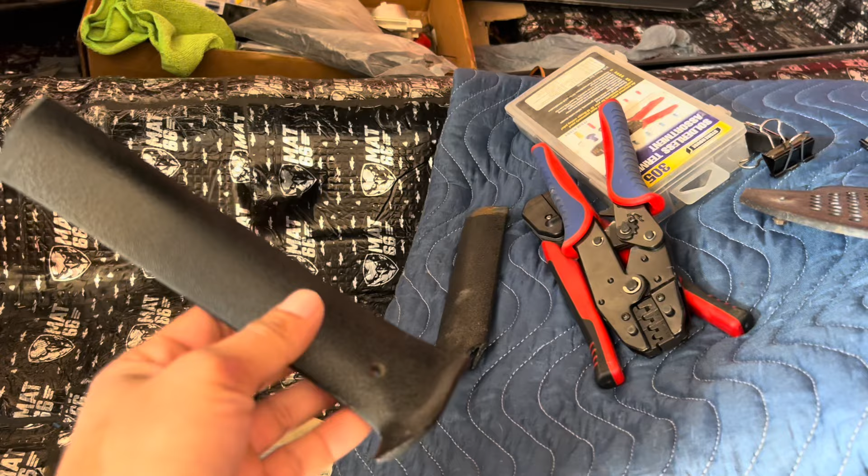So I'm gonna try to make this out of fiberglass. Worst case, I'll buy them, but I really don't want to. It doesn't make sense to pay $350 for these when you could buy new ones for about $200. But then again, I don't really know how it fits. So what I'm thinking of doing, if I can do it, is make some kind of template first. I do have some ideas on how to make it a little bit better.

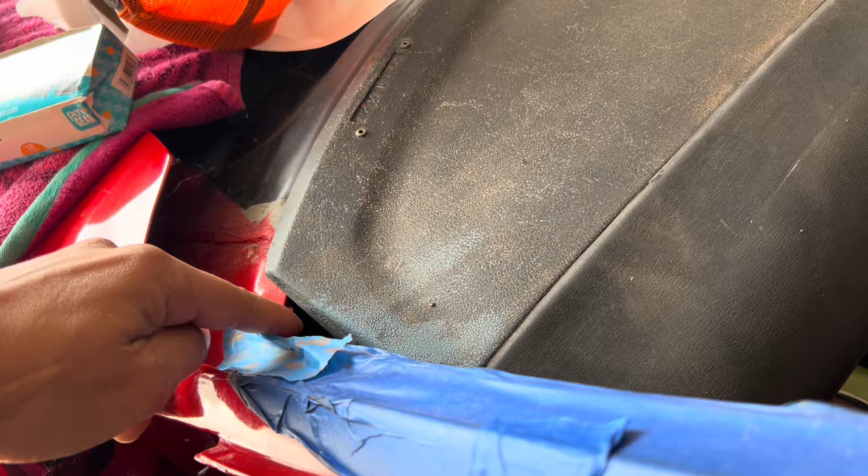I believe it just kind of goes down to here, hiding all the nuts and bolts. I temporarily put this on here just for me to see where I have to build it to. So I'm guessing it kind of hides this little opening here as well.